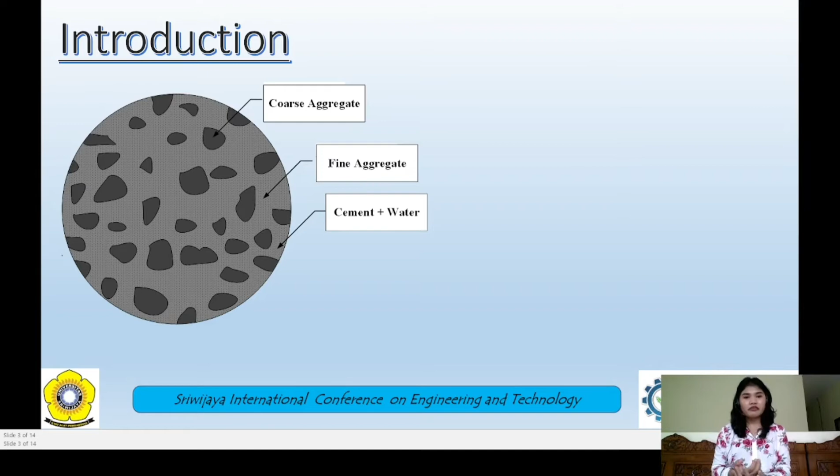The first point, introduction. Concrete is the most common building material in building construction. The basic composition of concrete includes cement, water, and aggregate. As we know, concrete has low tensile strength, and this characteristic is often neglected in design. The low tensile strength shown in concrete causes the material to crack easily when subject to tension. But various methods have been carried out to overcome the weakness of concrete in tension, one of them being the use of fibers in concrete.

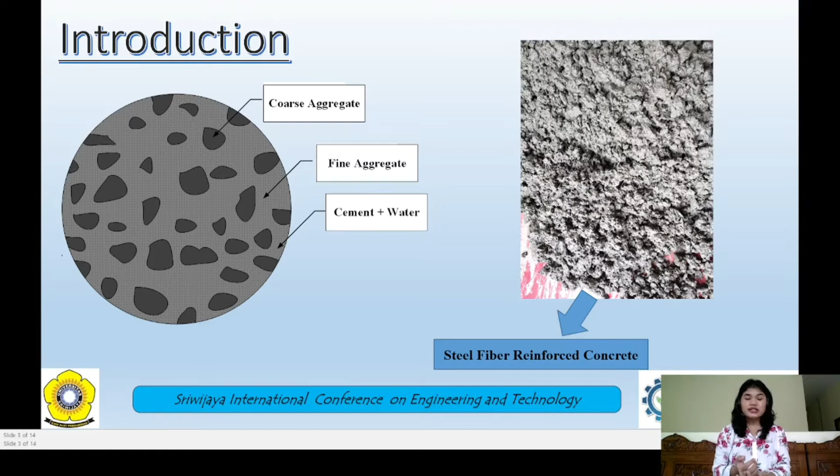Steel fiber reinforced concrete is a type of fiber reinforced concrete that uses steel fiber in its mixture to strengthen the concrete. A good composition of fibers in concrete can produce a composite material with the ability to reduce crack width and increase the flexural strength of concrete. However, the fiber type and content used in the mixture affect the workability of concrete.

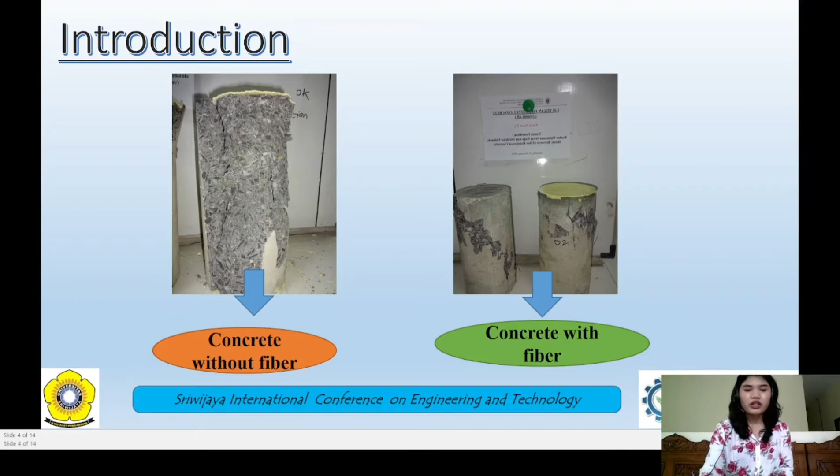Some investigations have found that the compressive strength of concrete increases with the fiber content used. The use of fibers with different lengths can significantly improve the mechanical properties of concrete by increasing the compressive strength by about 10 up to 32%.

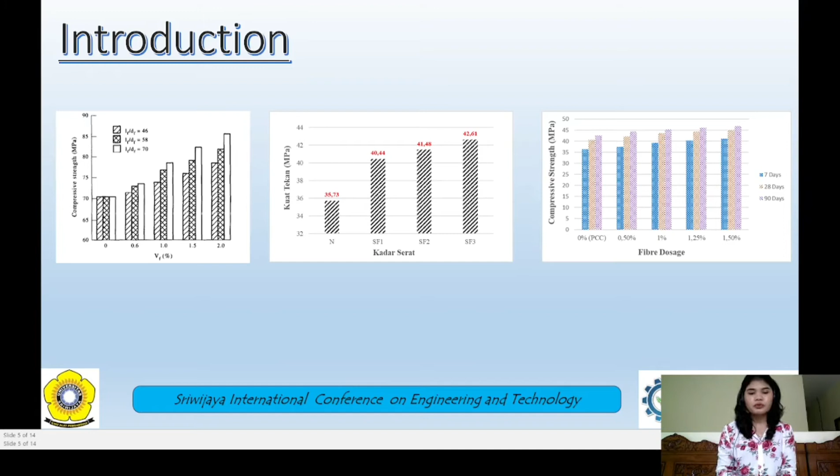The second point, experimental test program. The effect of fiber content on the compressive strength of concrete is investigated in the laboratory of Civil Engineering, Diponegoro University. Concrete specimens with 8 different fiber contents ranging from 0% up to 1.5% were tested.

The concrete is composed of Portland cement, sand from Muntilan, coarse aggregate from Batang, and steel fiber of Dramix 4D with aspect ratio 67.7.

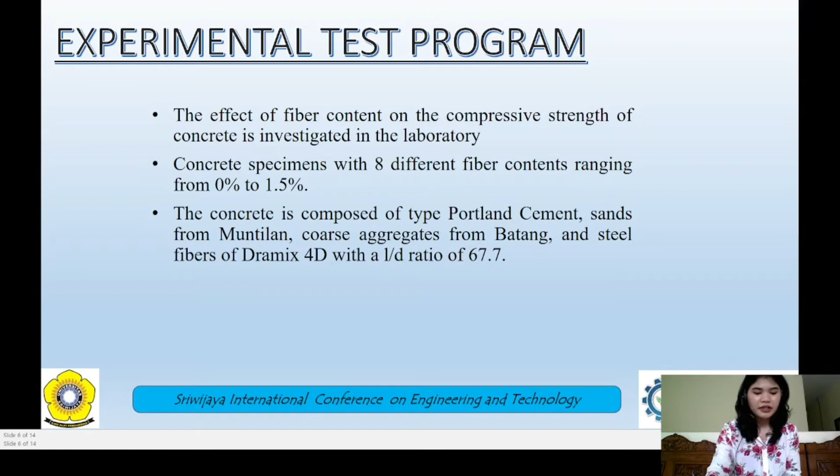Figure 1 shows the shape of the steel fiber used, namely end-hook steel fiber. Table 1 shows the properties of steel fibers, including material properties and geometry.

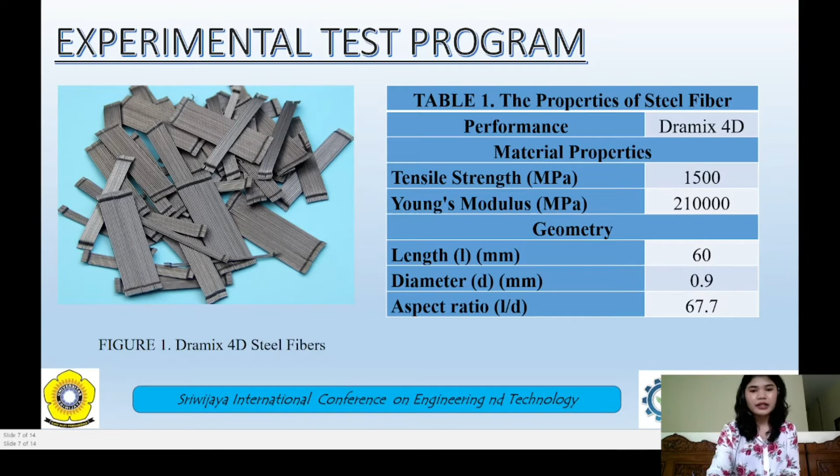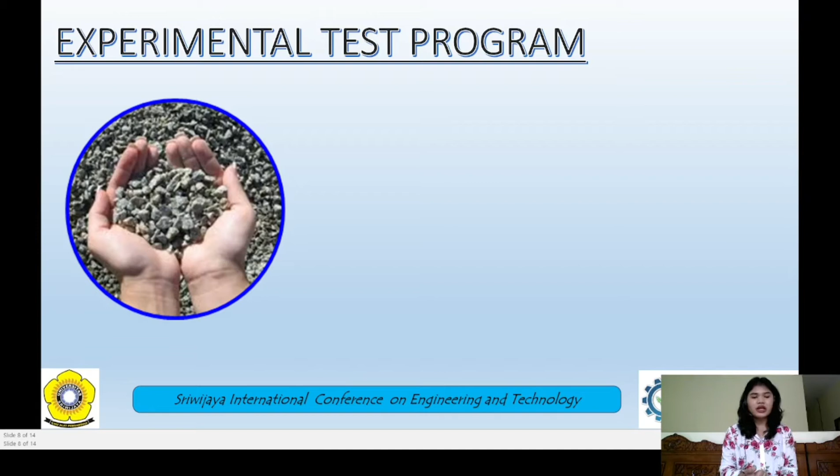The concrete materials are analyzed to determine their characteristics as the basis for determining the mixture ratio, and the material tests include sieve analysis, bulk density, SSD density, and others.

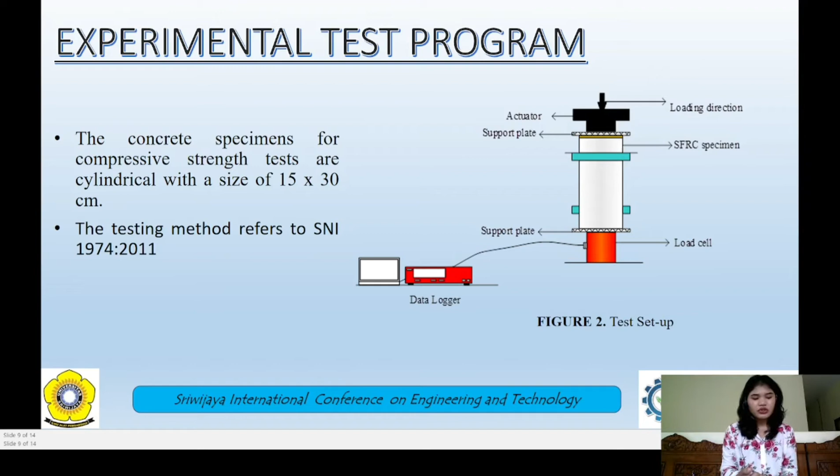The concrete specimens for compressive strength tests are cylindrical with a size of 15 by 30 centimeters. The testing methods refer to SNI 1974:2011. The test setup is as shown in figure 2. This test measures the load on each specimen using a load cell connected to a data logger.

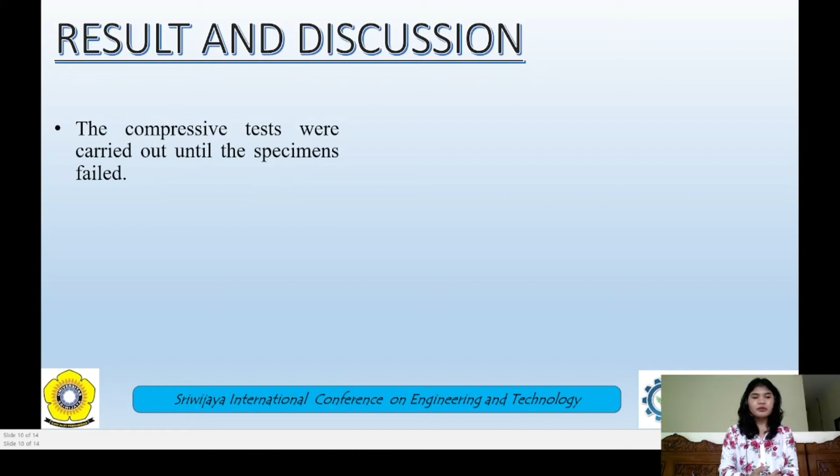It can be seen from figure 4 that the addition of steel fibers increases the compressive strength of concrete. The effect of fiber content is significantly visible when the fiber increases from 0% up to 0.1%. The increase in compressive strength continues with the increase of fiber content.

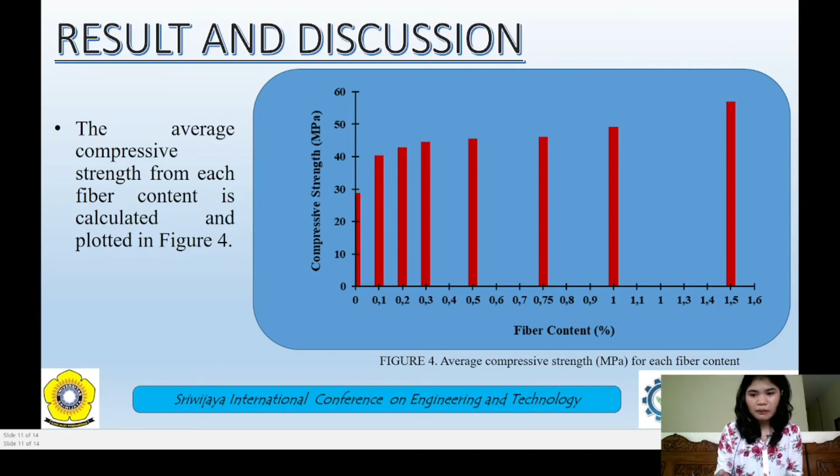However, the increase in strength is relatively small for specimens with fiber contents of 0.1% up to 1%.

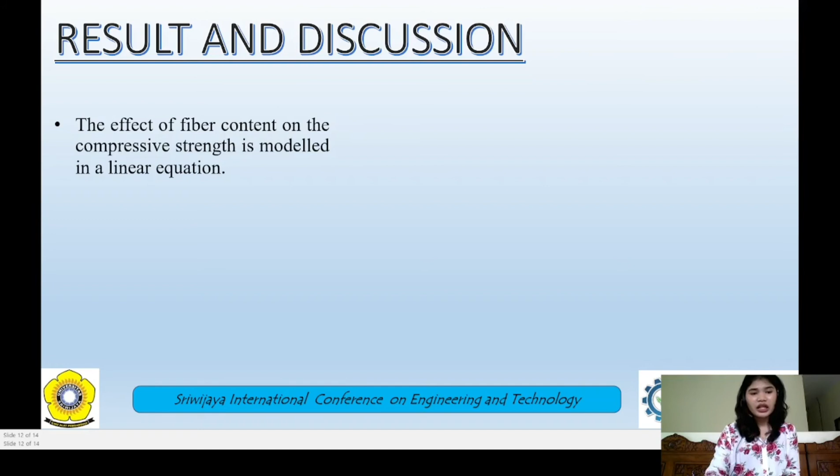The effect of fiber content on the compressive strength is modeled in a linear equation. We can see figure 5 about the linear model of the compressive strength of SFRC, and the equation is presented in equation 1.

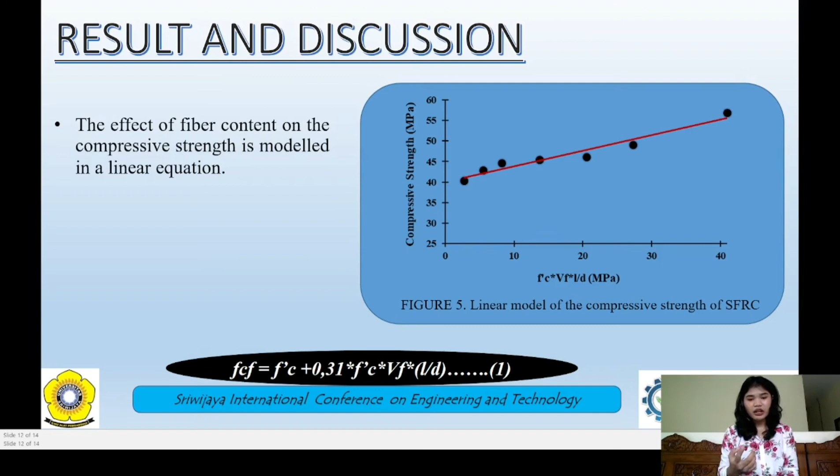From equation 1, we can see FCF. FCF is the compressive strength of SFRC, VF is the fiber content, and L per D is the aspect ratio.

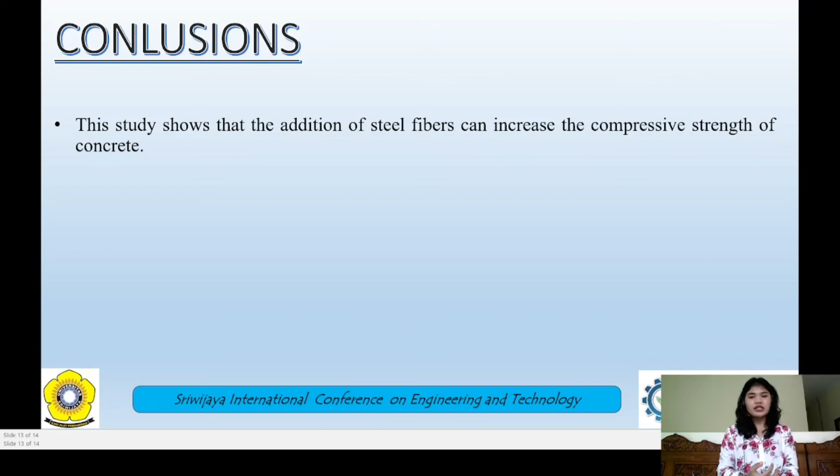The last point, conclusion. This study shows that the addition of steel fibers can increase the compressive strength of concrete. The increase in compressive strength is comparable to the fiber content. However, the increase of compressive strength is only about 21% when the fiber content increased from 0.1% up to 1%.

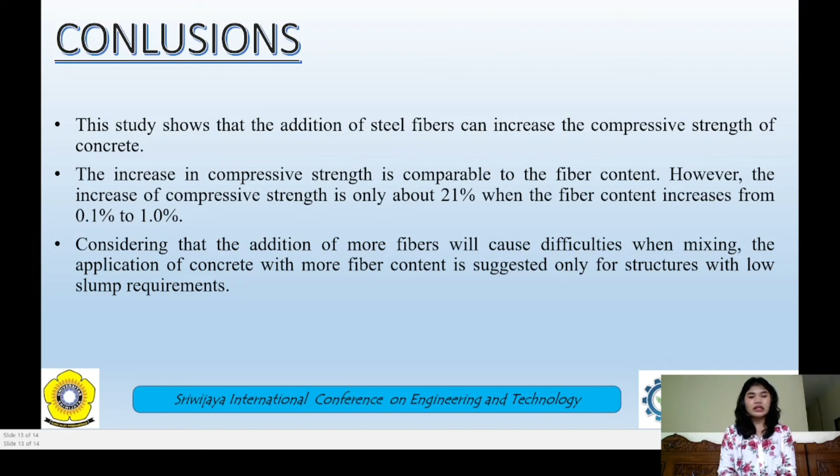Considering that the addition of more fibers will cause difficulties when mixing, the application of concrete with more fiber content is suggested only for structures with low slump requirements.

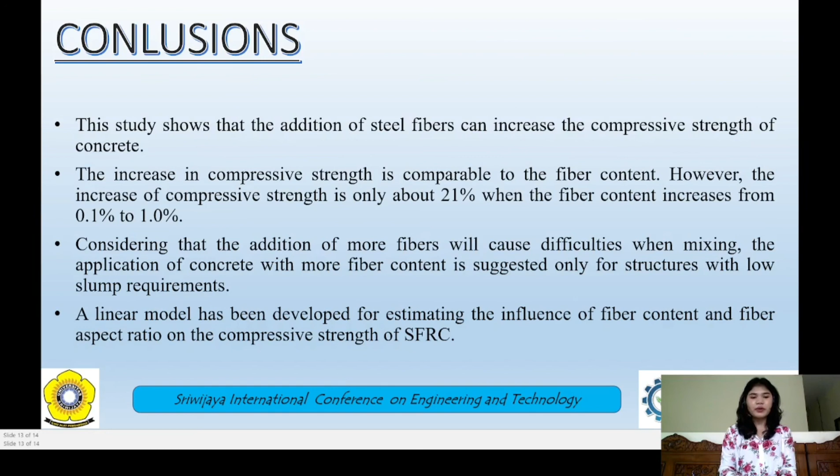A linear model has been developed for estimating the influence of fiber content and fiber aspect ratio on the compressive strength of SFRC. That's all about our presentation.